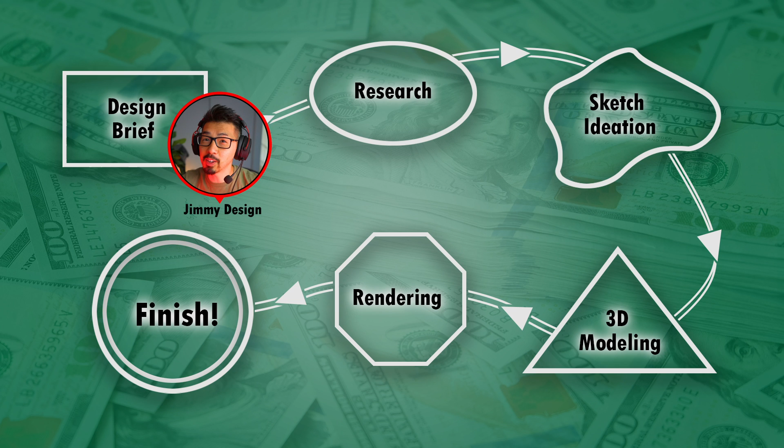Anyways, as the video progresses, I'll get closer to the final design, and at the very end we'll see if I'm successful, or fail. So here we are, the design brief.

This is gonna be a money briefcase for Mr. Beast. One, it's gotta be made out of metal, it has to be secure. Two, it needs to have some kind of a lock. Three, of course it needs to be transportable, so it's gonna need to have a handle.

I definitely wanna make it really cool looking and match his branding aesthetic. And also, since I am a consumer electronics designer, I wanna add some type of an electronic in it. Stick around to see what I end up doing. I'm excited to get started.

Let's move on to research. So I'm watching how much money will fit in a briefcase by GeekBeat.

Revision 3, oh my gosh, how many of you guys remember that? That's some old school YouTube. He's using one of those black briefcases. I know Mr. Beast uses the silver ones.

The actual measurements I get on this real stack of used $100 bills. Even with these dimensions, I could tell that it's too small just because some of those bills are overlapping each other. We want to have some nice stacks that align and also maybe give it a little bit of breathing room. You can fit exactly $1 million. But he was using $100 bills, and we know that Mr. Beast only used singles, so it only fits about $10,000.

Hey, we got a prankster. Dropping $1 million prank, 31 million views, damn. Excuse me, sorry. Oh fuck, crazy, yo. He's actually not using a regular briefcase, it actually just looks like one of those travel luggage bags. Can't use that, we gotta use a briefcase.

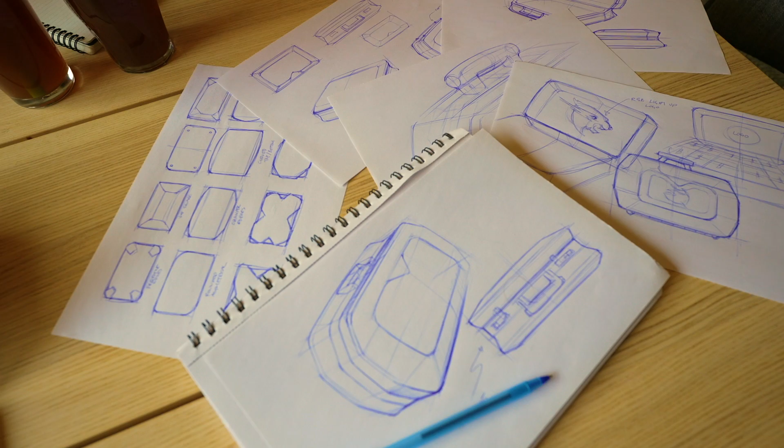This sketch exploration phase actually went so much easier than the last video where I designed those Yeezy shoes. If you haven't seen that yet, oh my gosh, I struggled so much with that.

They ask you how you are, you just have to say that you're fine when you're not really fine, but you just can't get into it.

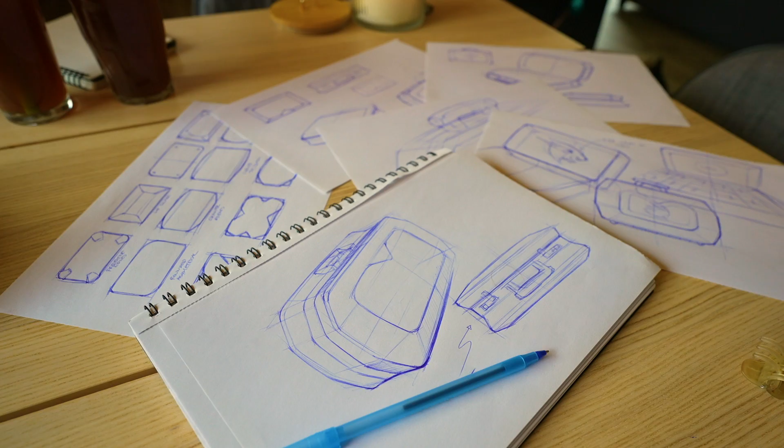Designing this briefcase is just so much more in my wheelhouse, and I'm super excited to jump into the next phase, which is building this thing in SolidWorks. Let's go!

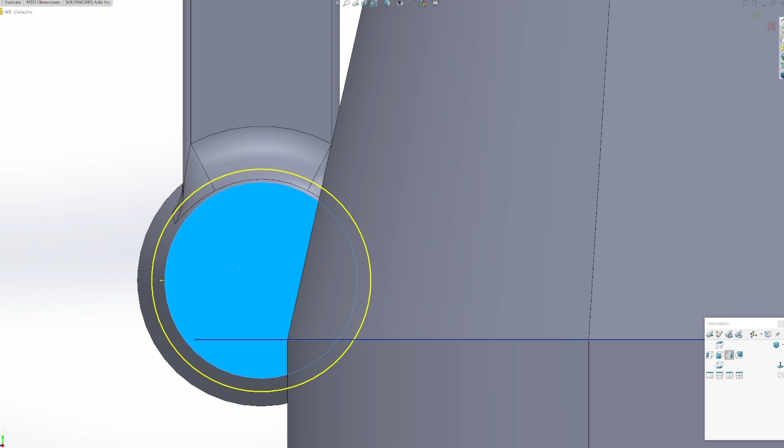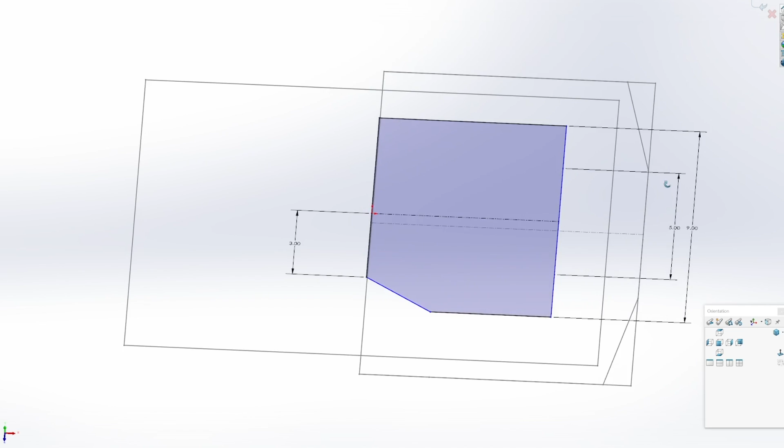Time for some 3D modeling commentary. Made sure I dimensioned everything, bordered everything out, gave myself enough space. Lofted the two profiles together with surfaces, just added some fillets to make sure it was nice and round on the edges. Started building the base bottom using the exact same method as I did for the top case.

Then it was time to build the side walls, that's the profile. Building the rear walls separately than the sides just because it was going to be flat in comparison to the side walls which have that indent.

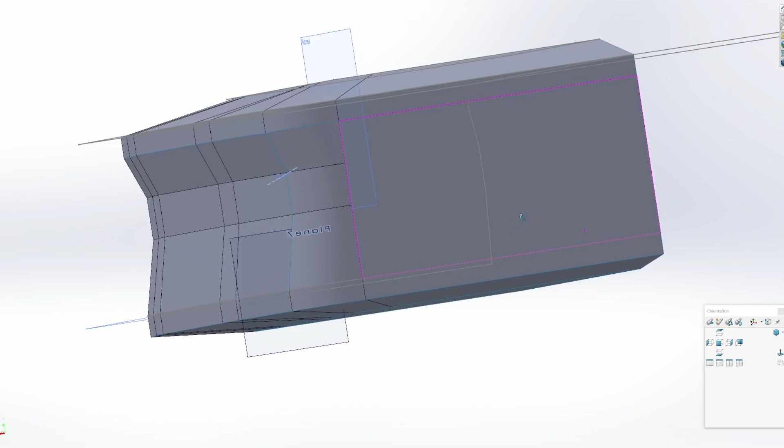At this point it was looking pretty good, so I decided to mirror it to see the full form together. For the top shape I ended up making it a B shape to represent Beast.

I was pretty happy with how the overall shape turned out, so I started to add in some of the smaller details with the feet, the hinge, the handle, how the handle connects to the briefcase itself, splitting the top panel here to be its own separate piece.

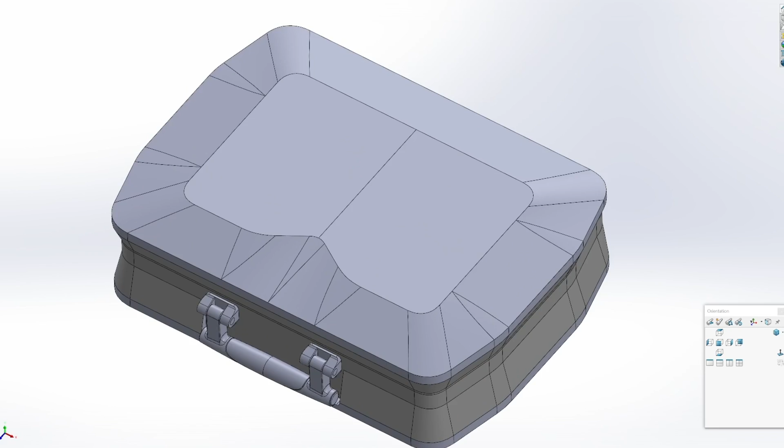It'll be like a metal inlay, building the details of the lock mechanism, deciding to go with the same lock mechanism you see on traditional briefcases because if it ain't broke, why fix it?

At this point, it was time to start building out the interior, cutting out the cavity to where the cash can sit inside. Built out the cash block with the money strap. I'll end up duplicating it during the next phase of rendering.

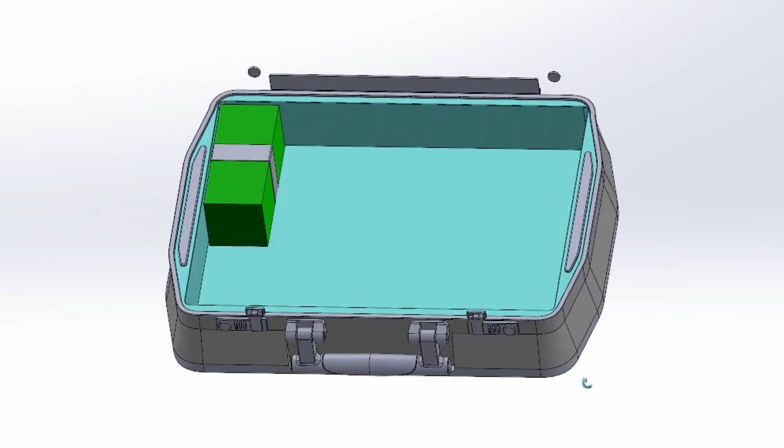Since Mr. Beast presents the briefcases open showing off the money, it was a good idea to place his logo where the organizer would be on the top shelf. When the money is being presented, his logo will also be presented at the same time.

I could have spent a couple more hours fine-tuning everything, but honestly guys, I'd spent so much time to get it to this point, and I'm so ready to start rendering this bad boy up.